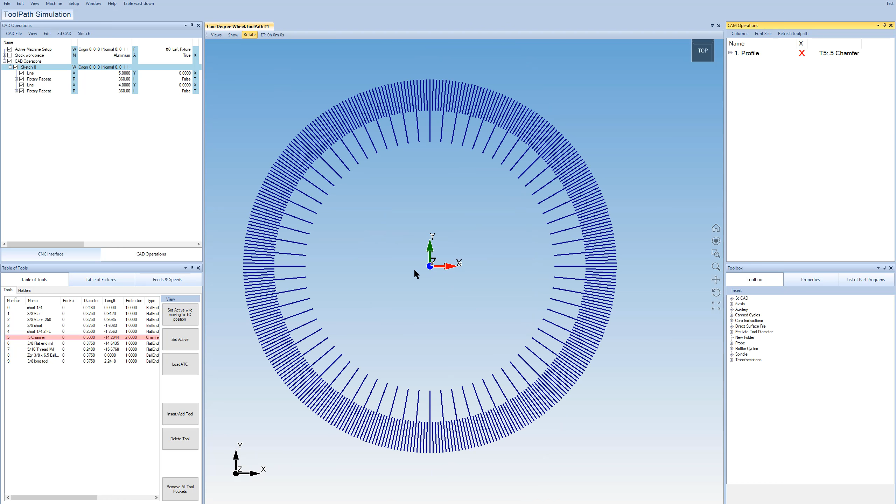So we're going to show how to make this. Let's go ahead and make a new file, and then we'll also show how to cut this as well. So let's do a new sketch, then view normal to plane, and create line. We'll just come over here and create a line.

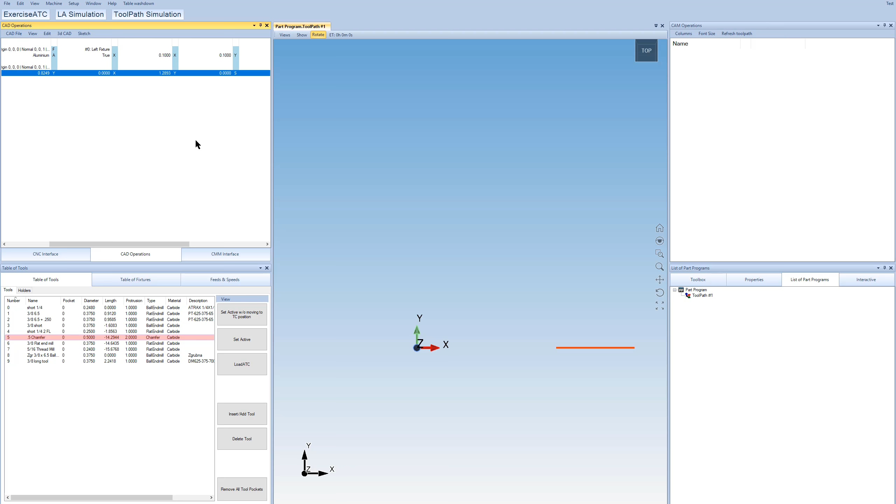We're going to insert 0 in Y for both the start and end point, and the X location will start at, say, 4 inches and go out to 5 inches. So there's our one single line. Now we're going to come over here and do repeat, rotary repeat, select that one line, and hit OK.

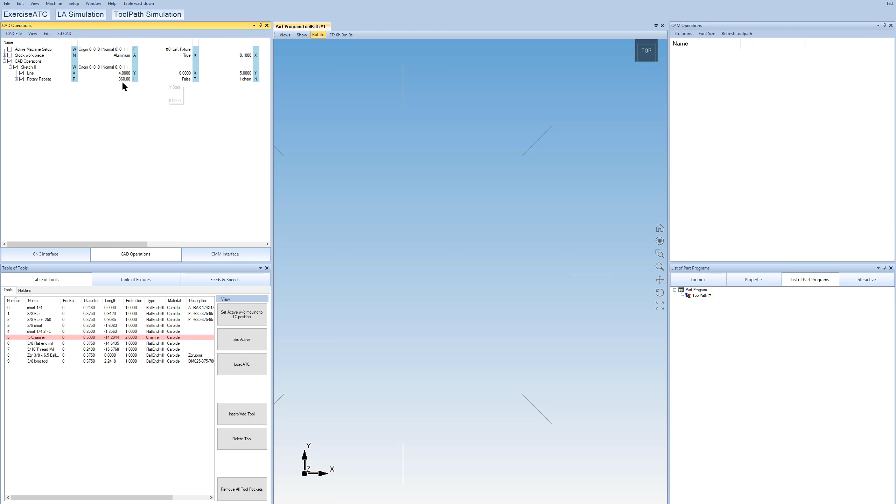In our rotary repeat, we're going to go 360 degrees around, and we're going to change the 8 to 360 as well, so that's 360 degrees, one line per degree. And then we'll go ahead and make another one.

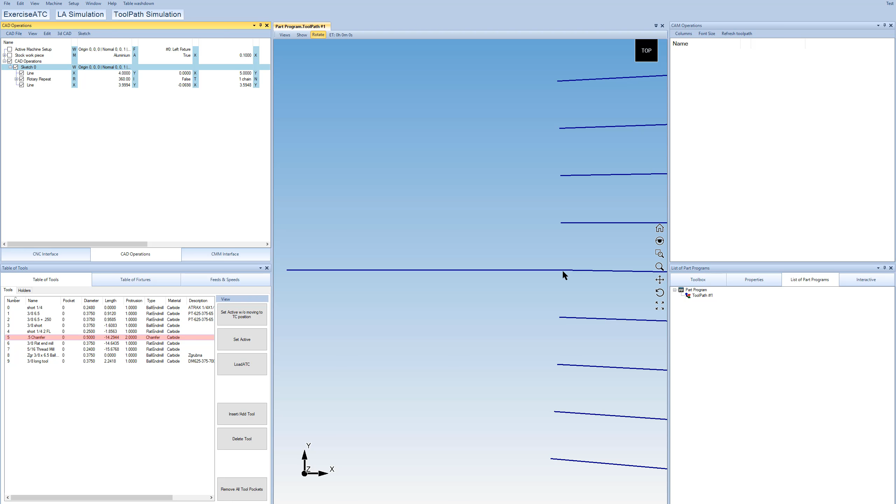In Sketch, we want to click Create New Line. We're going to go to our first one here and do something like that. We're basically going to start at the internal end point of the line we first created at 0 degrees, and go in towards 0.

It looks like I didn't quite snap that on properly, so let's edit some of these numbers. We're going to do 0 and 0 for the endpoints, and then 4 and 3. Okay, something like that.

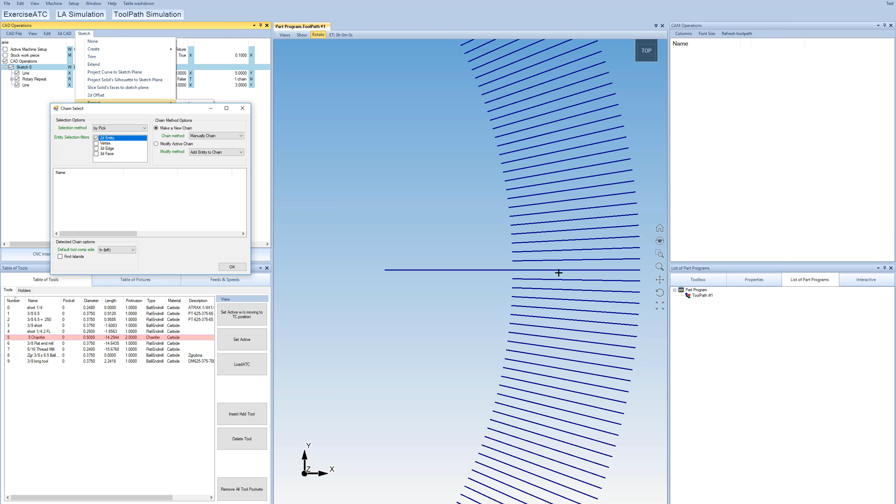So again, we're going to do rotary repeat. This time, if I leave it on automatic chain, it's going to chain this edge and this one together. So I want to manually chain just this one line so we don't also get the adjacent line. We'll click on that one, and then we should get, yep, there's our 8 again.

We'll just change this, instead of 8, to 72. That's basically 360 divided by 5. Okay, something like that.

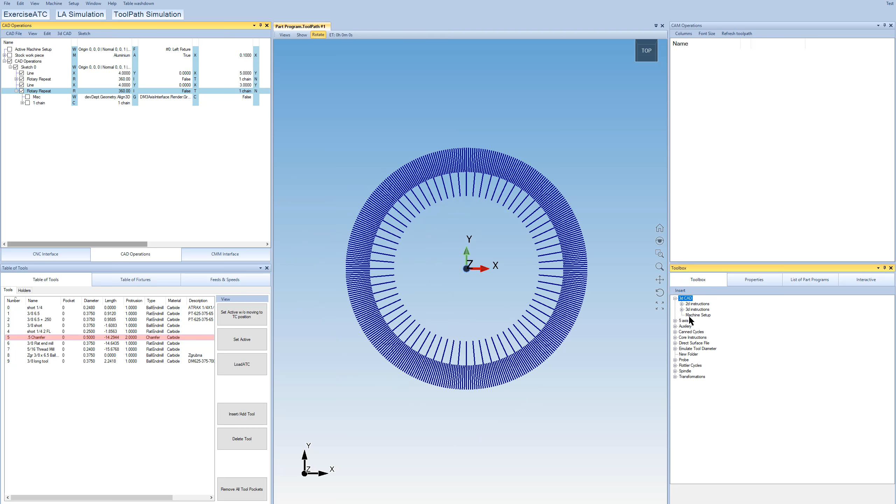That looks good, so now we're going to go ahead and cut that. We come over here to 2D toolpaths and do profile, select by box, and for tool compensation we definitely want to cut this on the center line, so we do no offset. Then we just grab all of these.

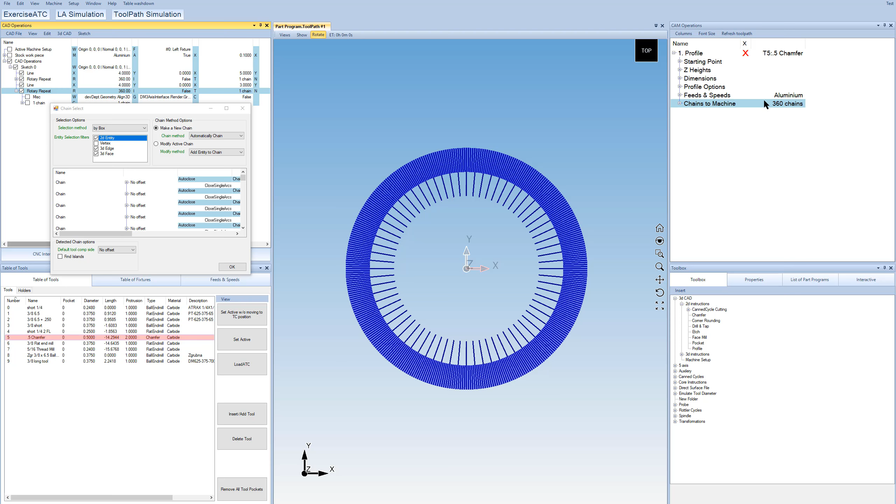You see it kind of go around like that and find all the chains. Once it's done, this should get up to 360. Now, if you have more than 360, that means it's somehow double-selecting the chains, like this edge and this edge, maybe counted twice because there are 2 entities or something. But here we have 360, so that's exactly what we want.

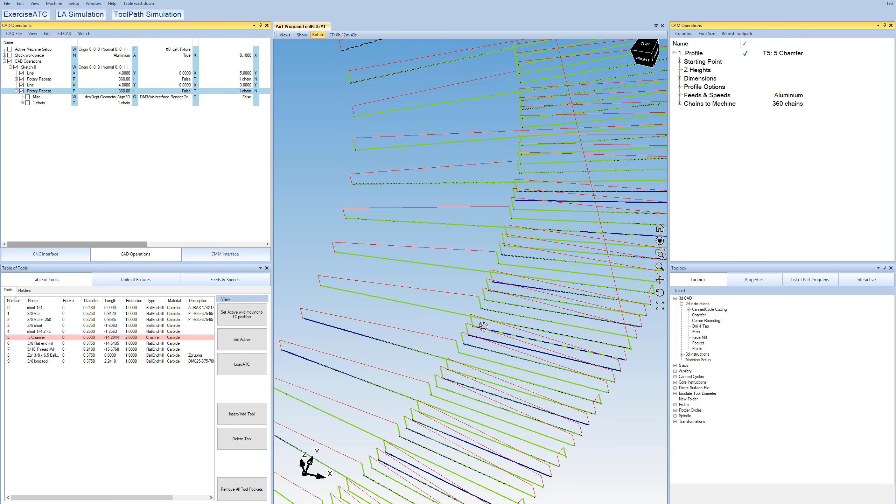So that looks good, let's go ahead and compile that. Let's zoom in and see what it looks like. It's hard to say what order it's going to cut this in, but it should get all the moves correct, like any other profile operation.

One other thing we have to do here is profile defaults to a lead-in radius, so we definitely want to turn that off. Do a lead-in of just plunge down, and then I think we have to recompile when we change that. Okay, so that looks better.

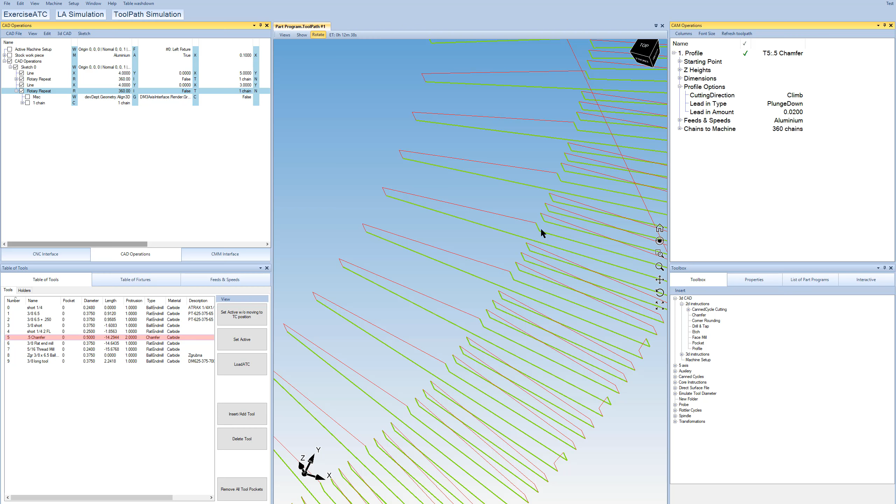So now we're just going to plunge straight down. That should cut everything, and one important note here is that it's going to do a continuous move on these, every 5th one that's extended, that's a 2-inch line, rather than doing it in 2 1-inch segments. So it's automatically detected that those are adjacent lines, and it does one continuous move. So that should help make a shape like that. Thanks.